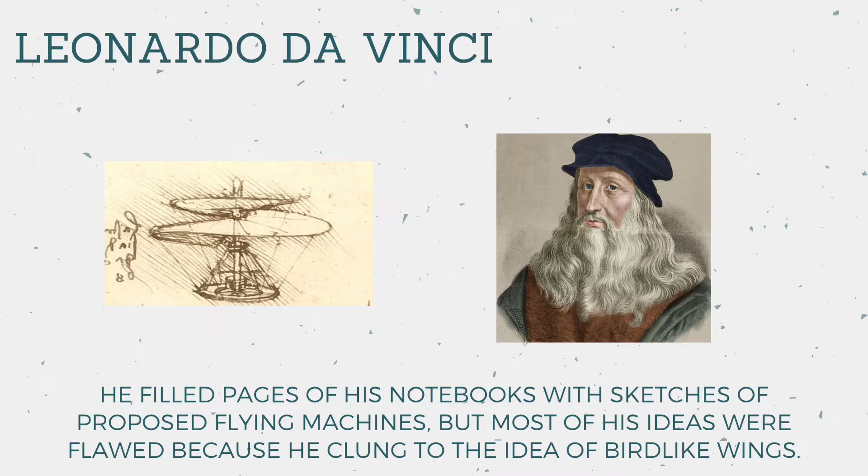Of course, you can't study a subject without knowing its history, so here's the people who contributed to the aviation industry. First, we have Leonardo Da Vinci. He filled pages of his notebooks with sketches of proposed flying machines, but most of his ideas were flawed because he clung to the idea of bird-like wings. Robert Hooke concluded that the human body does not possess the strength to power artificial wings.

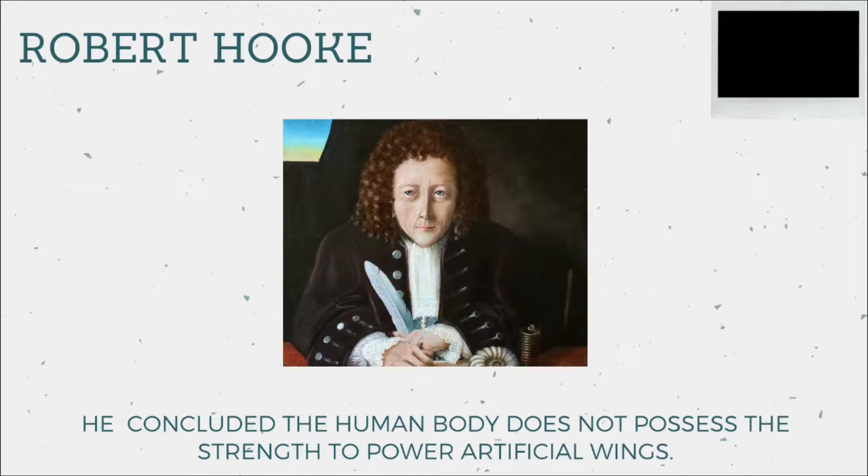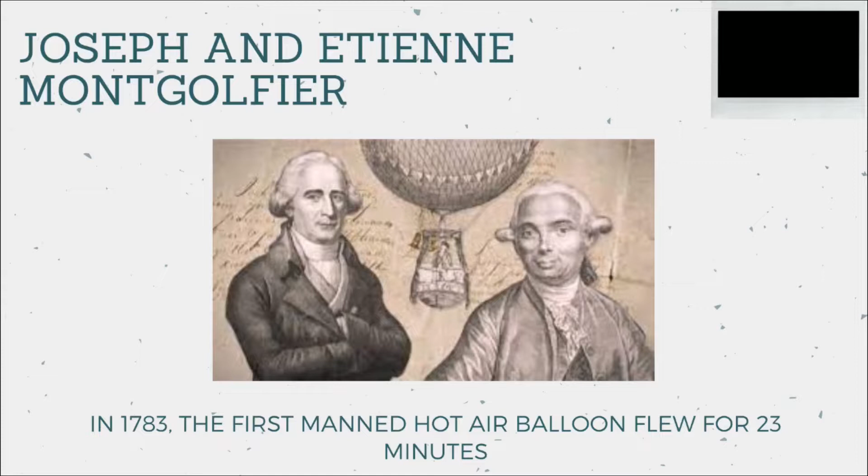Joseph and Etienne Montgolfier: in 1783, the first manned hot air balloon flew for 23 minutes. Professor Jacques Charles, 10 days later after the said event, flew the first ever gas balloon.

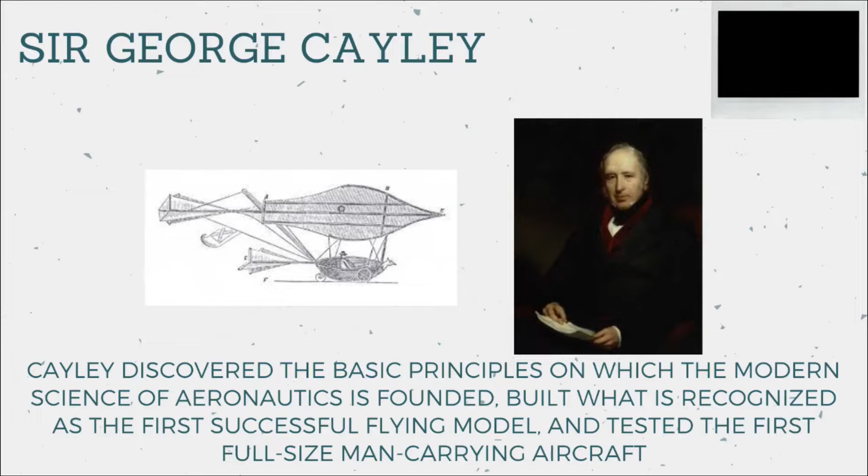Next up is Sir George Cayley. Cayley discovered the basic principles on which the modern science of aeronautics is founded, built what is recognized as the first successful flying model, and tested the first full-size man-carrying aircraft. William Samuel Henson designed a huge monoplane that was propelled by a steam engine housed inside the fuselage. Otto Lilienthal proved that human flight in aircraft heavier than air was practical, and worked toward the dream of powered flight.

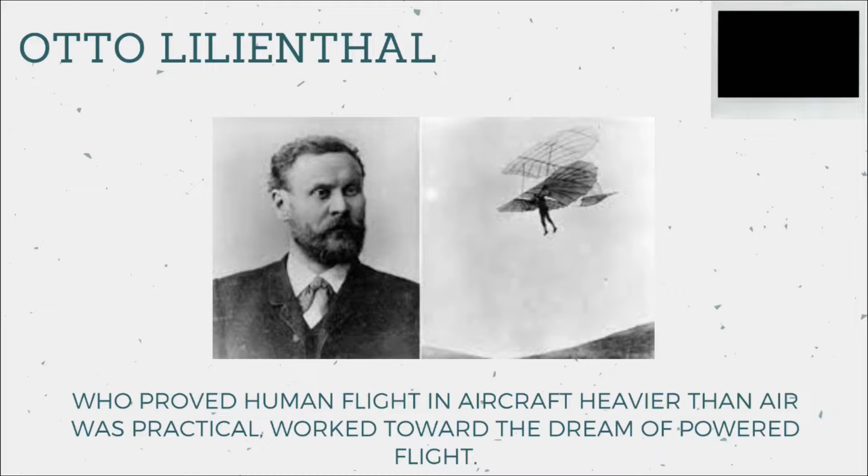And lastly, the Wright Brothers. The bicycle-building Wright Brothers of Dayton, Ohio had experimented for 4 years with kites, their own homemade wind tunnel, and different engines to power their biplane. Their biplane, called the Flyer, combined inspired design and engineering with superior craftsmanship.

By the afternoon of December 17, 1903, near Kitty Hawk, North Carolina, the Wright brothers flew a total of 98 seconds over 4 flights. So now that we are through the history of aviation, we can now go to the aircraft structures.

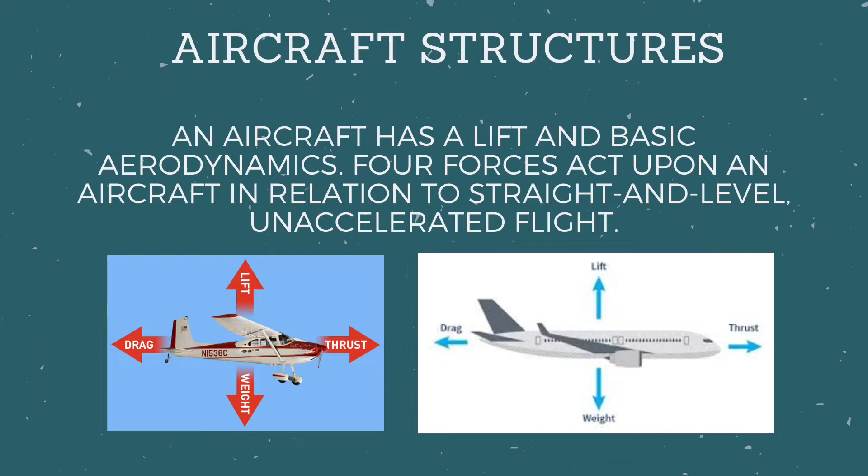An aircraft has lift and basic aerodynamics. 4 forces act upon an aircraft in relation to straight and level, unaccelerated flight.

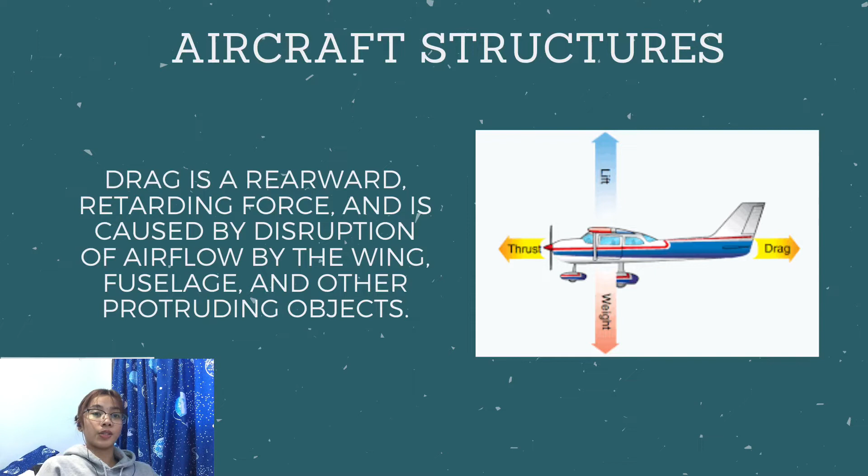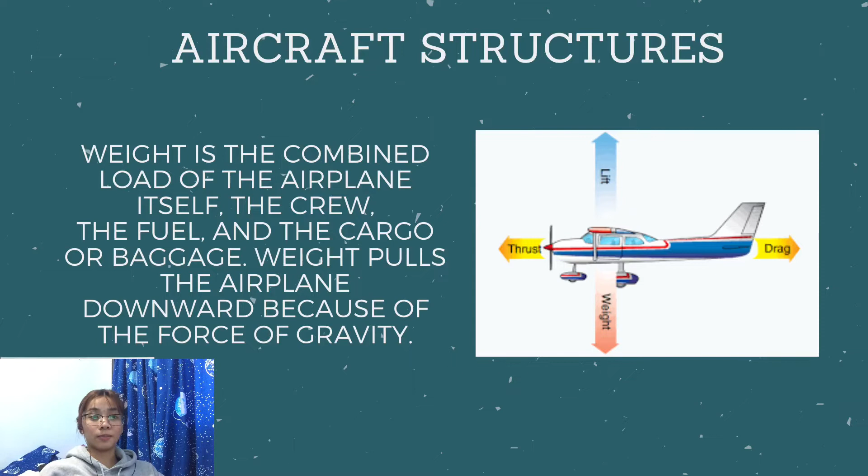Thrust is the forward force produced by the power plant or propeller. Drag is a rearward retarding force caused by disruption of airflow by the wing, fuselage, and other protruding objects. Weight is the combined load of the airplane itself, the crew, the fuel, and the cargo or baggage; weight pulls the airplane downward because of the force of gravity. And lastly, lift opposes the downward force of weight and is produced by the dynamic effect of the air acting on the wing.

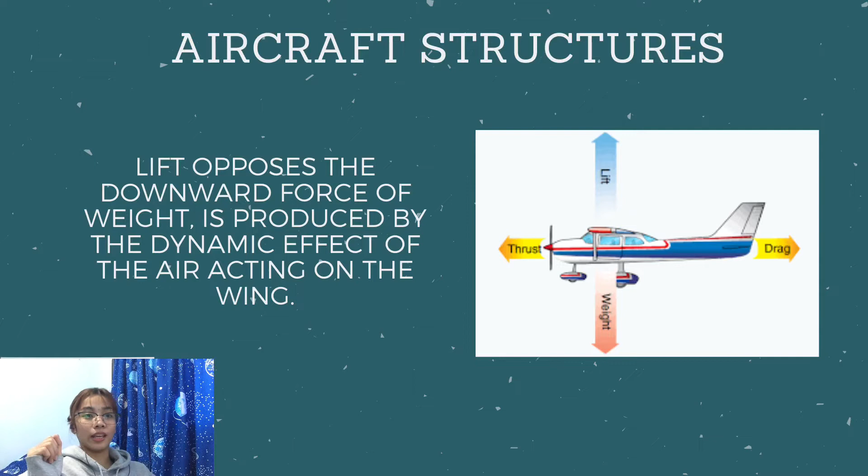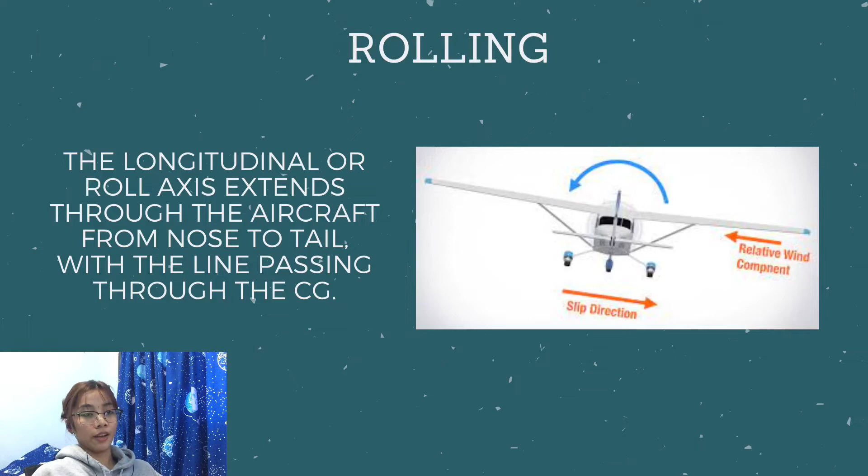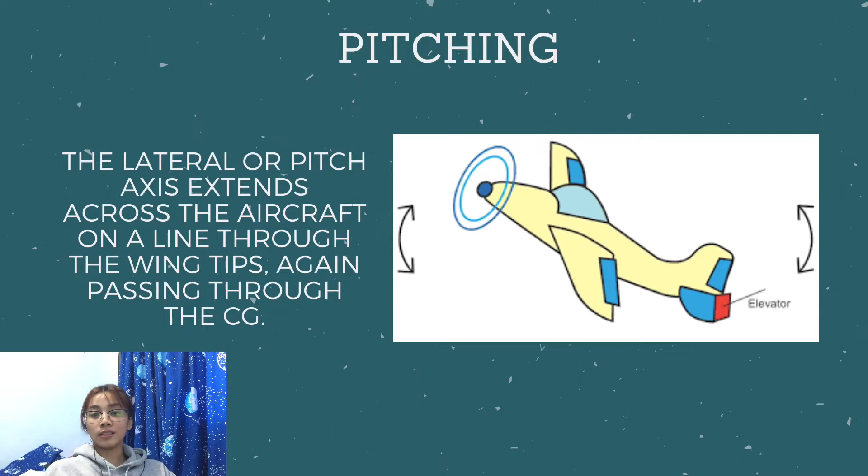An aircraft also moves in 3 dimensions and is controlled by moving it about one or more of its axes. First is the longitudinal or roll axis. This extends through the aircraft from nose to tail, with the line passing through the CG, or center of gravity. Second is the lateral or pitch axis. This extends across the aircraft on a line through the wing tips, again passing through the center of gravity.

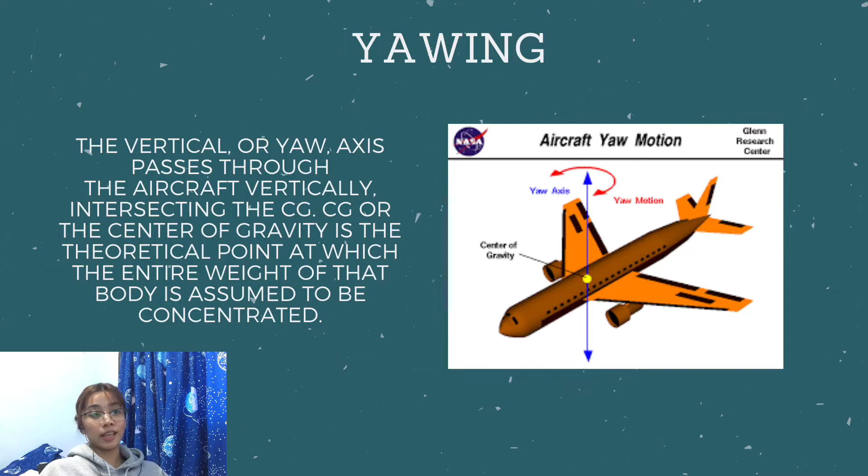Lastly, the vertical or yaw axis. This axis passes through the aircraft vertically, intersecting the CG. CG, or the center of gravity, is the theoretical point at which the entire weight of that body is assumed to be concentrated. Next up are the major components of an aircraft.

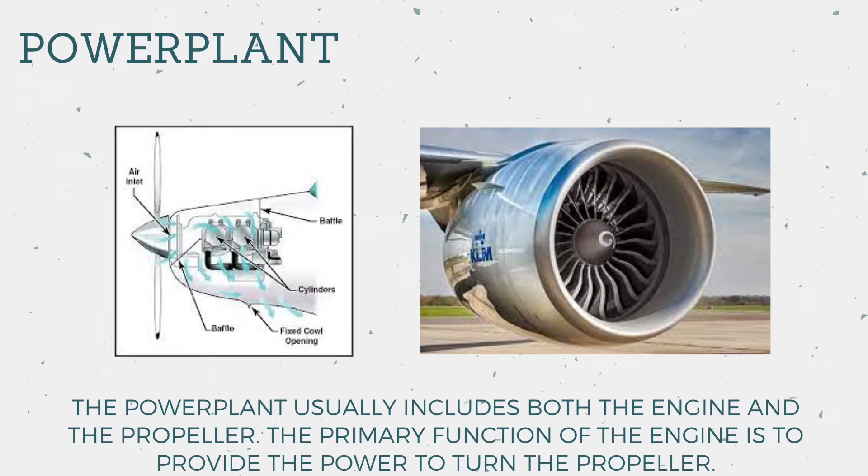We have the power plant. The power plant usually includes both the engine and the propeller. The primary function of the engine is to provide the power to turn the propeller.

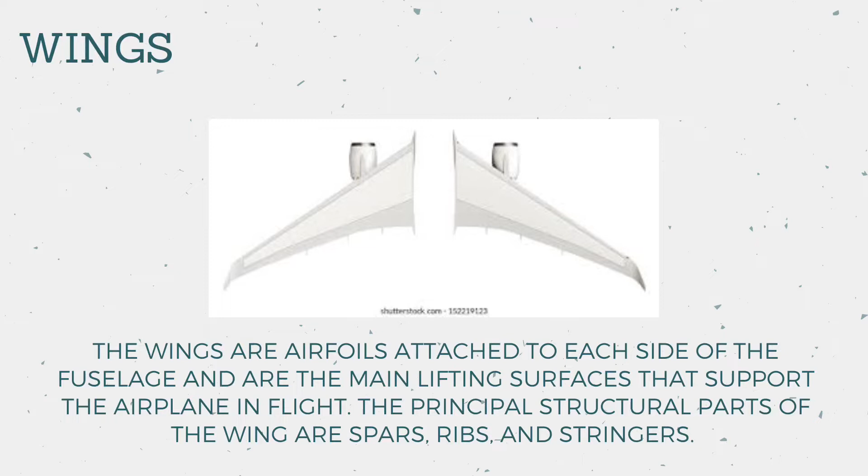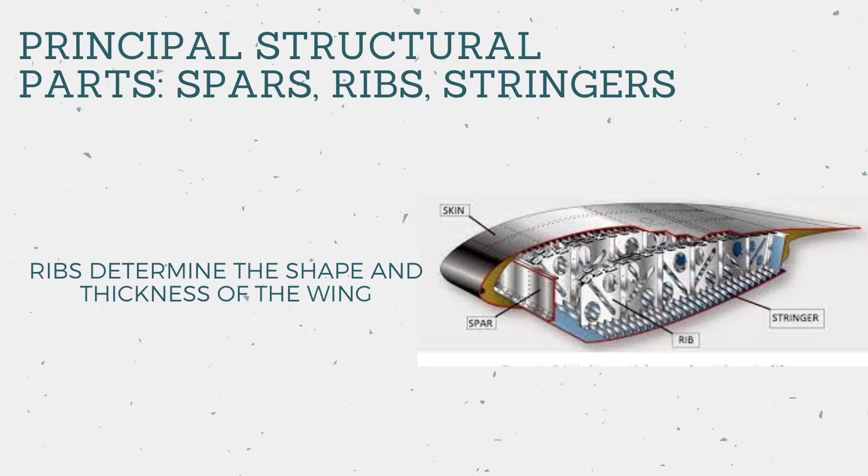Wings are airfoils attached to each side of the fuselage and are the main lifting surfaces that support the airplane in flight. The principal structural parts of the wing are spars, ribs, and stringers. Spars carry flight loads and the weight of the wings while on the ground. Ribs determine the shape and thickness of the wing. And lastly, the stringers serve as the structural components that transfer loads and stresses.

Next component is the empennage. The empennage includes the entire tail group and consists of fixed surfaces such as the vertical stabilizer and the horizontal stabilizers. The movable surfaces include the rudder, the elevator, and one or more trim tabs.

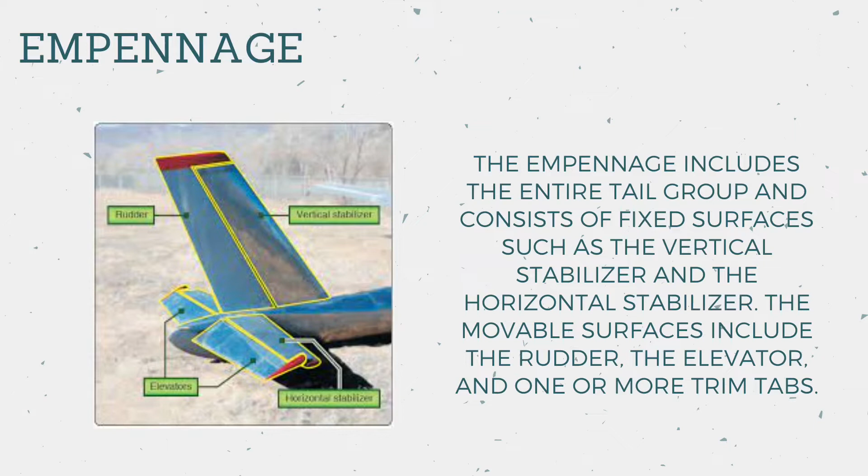Fourth component is the fuselage. The fuselage is the central body of an airplane and is designed to accommodate the crew, passengers, and cargo. It also provides the structural connection for the wings and tail assembly.

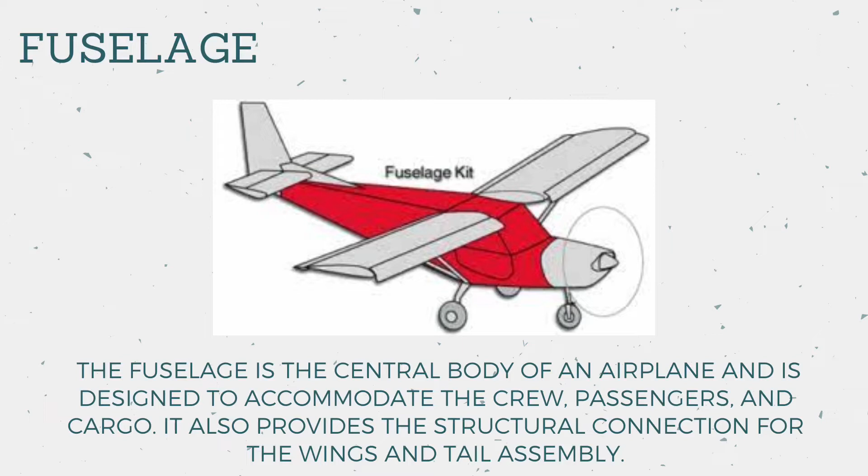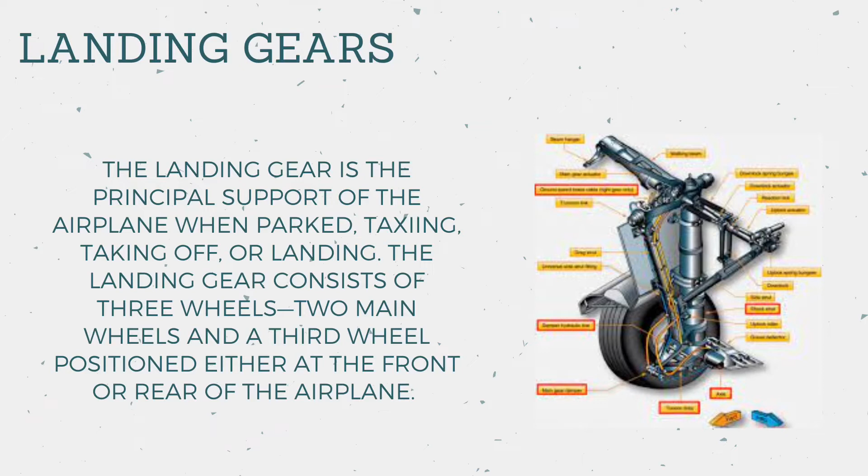And lastly, the landing gear. The landing gear is the principal support of the airplane when parked, taxiing, taking off, or landing. The landing gear consists of 3 wheels, 2 main wheels and the third wheel positioned either at the front or the rear of the airplane. Now let's go to the types of aircraft construction.

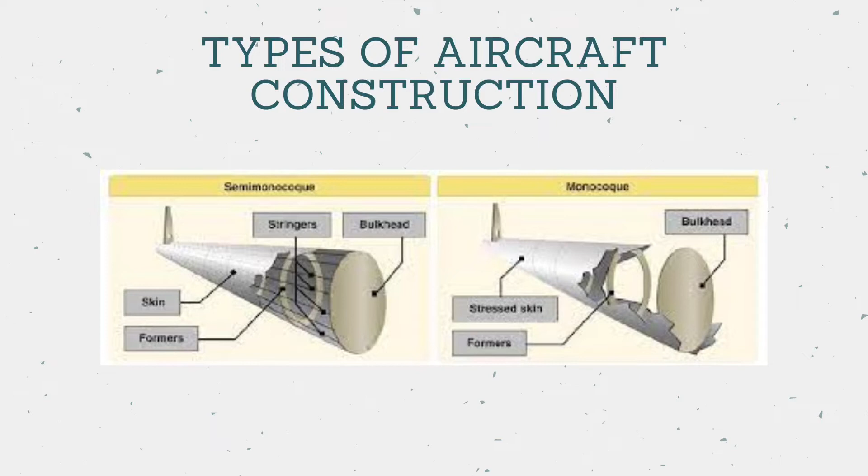The construction of aircraft fuselage evolved from the early wood truss structural arrangements to monocoque shell structures, to the current semi-monocoque shell structures. So let's now talk about the truss structure.

The main drawback of truss structure is its lack of a streamlined shape. In this construction method, lengths of tubing called longerons are welded in place to form a well-braced framework, and vertical and horizontal struts are welded to the longerons, giving the structure a square or rectangular shape when viewed from the end.

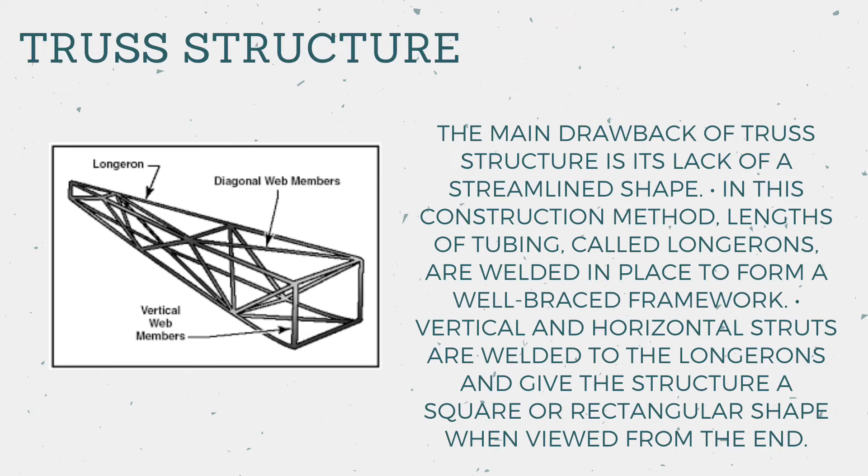Now we have the monocoque and the semi-monocoque construction. Monocoque construction uses stressed skin to support almost all loads. Although very strong, monocoque construction is not highly tolerant to deformation of the surface.

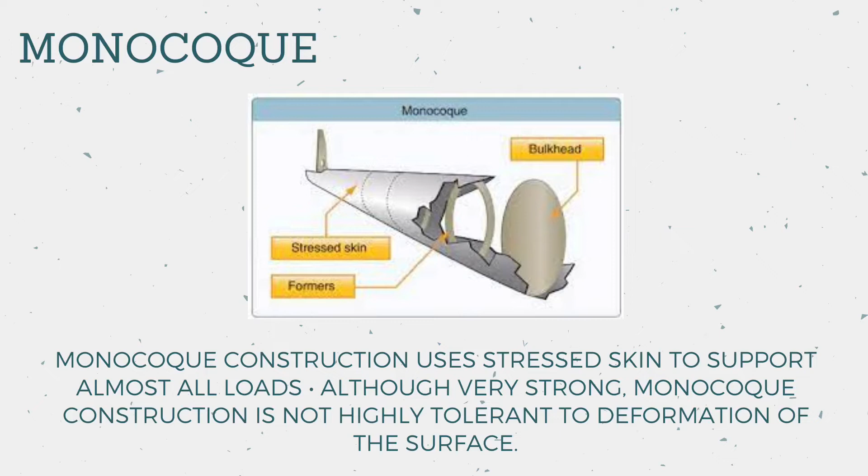In semi-monocoque construction, a substructure is used to which the airplane skin is attached. The substructure, which consists of bulkheads and/or formers of various sizes and stringers, reinforces the stressed skin by taking some of the bending stress from the fuselage.

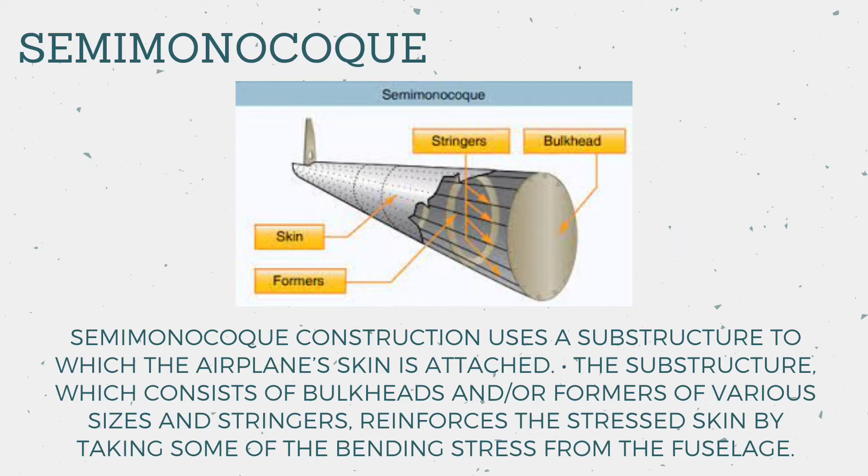Let's now talk about principles of flight. In this part, we will examine the fundamental physical laws governing the forces acting on an aircraft in flight, and what effect these natural laws and forces have on the performance characteristics of aircraft.

So let's now go over the structure of the atmosphere. The atmosphere is composed of 78% nitrogen, 21% oxygen, and 1% of other gases such as argon and helium. Some of these elements are heavier than others.

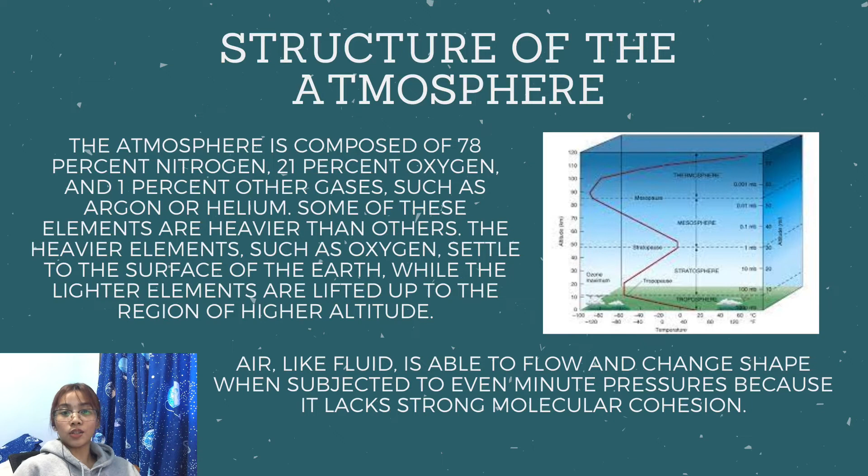The heavier elements, such as oxygen, settle to the surface of the Earth, while the lighter elements are lifted up to regions of higher altitude. Air, like fluid, is able to flow and change shape when subjected to even minute pressures because it lacks strong molecular cohesion. So after knowing the structure of the atmosphere, let's now get educated on atmospheric pressure.

Air is very light, but it has mass and is affected by the attraction of gravity. Therefore, like any other substance, it has weight, and because of its weight, it has force. Since it is a fluid-like substance, this force is exerted equally in all directions, and its effect on bodies within the air is called pressure.

Under standard conditions at sea level, the average pressure exerted by the weight of the atmosphere is approximately 14.70 pounds per square inch of surface.

The density of air has significant effects on aircraft performance because as air becomes less dense, it reduces power since the engine takes in less air, reduces thrust because a propeller is less efficient in thin air, and reduces lift because the thin air exerts less force on the airfoils.

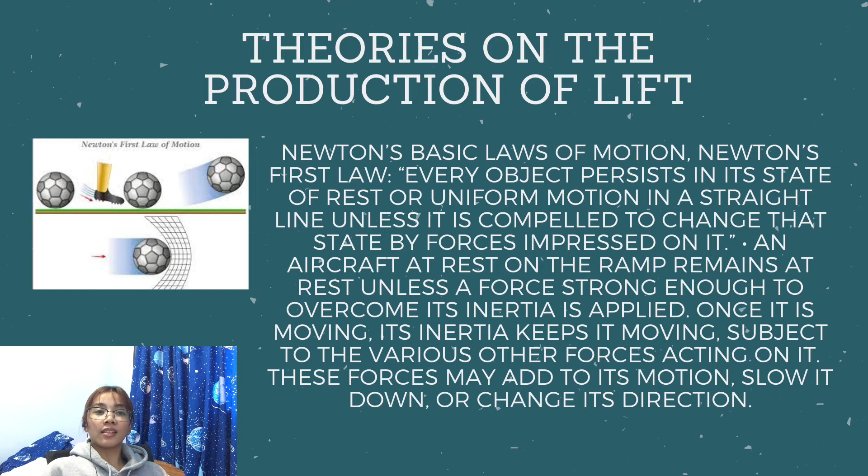Newton's first law states that every object persists in its state of rest or uniform motion in a straight line unless it is compelled to change that state by forces impressed on it. An aircraft at rest on the ramp remains at rest unless a force strong enough to overcome its inertia is applied. Once it's moving, its inertia keeps it moving, subject to the various other forces acting on it. These forces may add to its motion, slow it down, or change its direction.

Force is equal to the change in momentum per change in time. For a constant mass, force equals mass times acceleration. This takes into account the factors involved in overcoming Newton's first law, covering both changes in direction and speed, including starting up from rest, positive acceleration, and coming to a stop.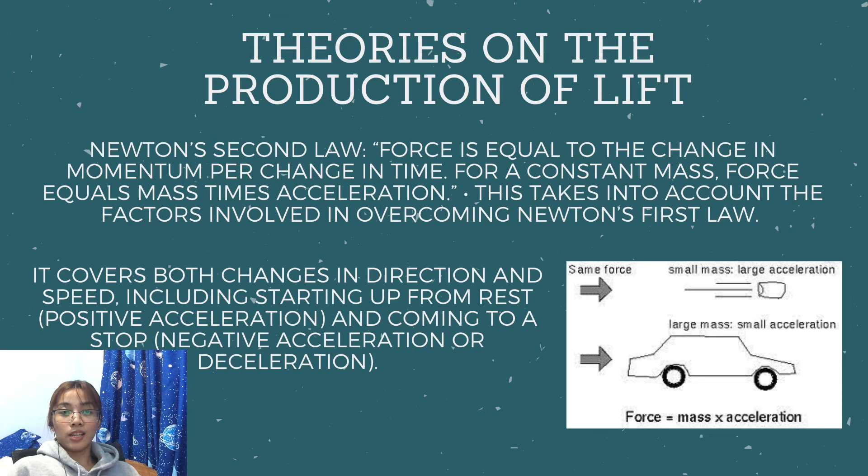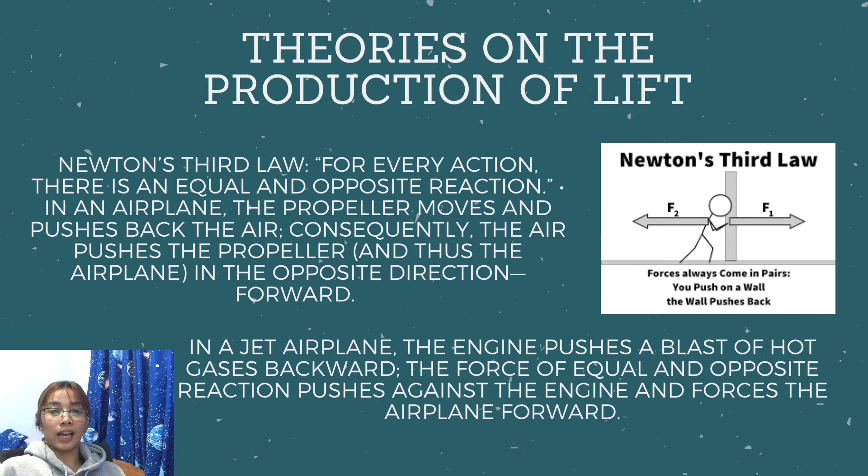Newton's third law states that for every action, there is an equal and opposite reaction. In an airplane, the propeller moves and pushes back the air; consequently, the air pushes the propeller and thus the airplane in the opposite direction. In a jet airplane, the engine pushes a blast of hot gases backward, and the equal and opposite reaction force pushes against the engine, forcing the airplane to move forward.

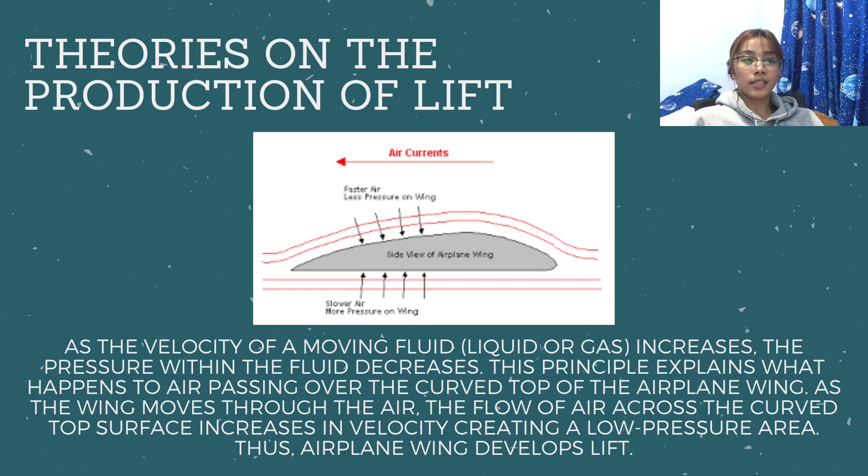And lastly, Bernoulli's principle of differential pressure states that as the velocity of a moving fluid, liquid or gas, increases, the pressure within the fluid decreases. This principle explains what happens to air passing over the curved top of the airplane wing. As the wing moves through the air, the flow of air across the curved top surface increases in velocity, creating a low pressure area. Thus, the airplane wing develops lift.

So that's my presentation on what I've learned in my subject, Introduction to Aviation with Principles of Flight.